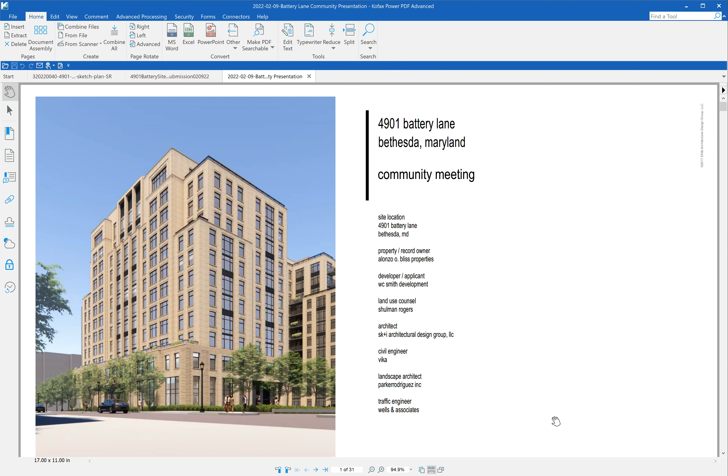So let me get right into it. I'm going to start sharing my screen. Hopefully this will work. Okay, can everyone see my screen? Yep, okay, great.

Most of you are familiar since you live on this site - it's colored in red here, located right on the north edge of Bethesda next to NIH in the Battery Lane district, which is outlined in red. There are two concentric circles on this plan showing it's about half a mile in each direction to the Bethesda metro station, and to the north to the medical center station on NIH.

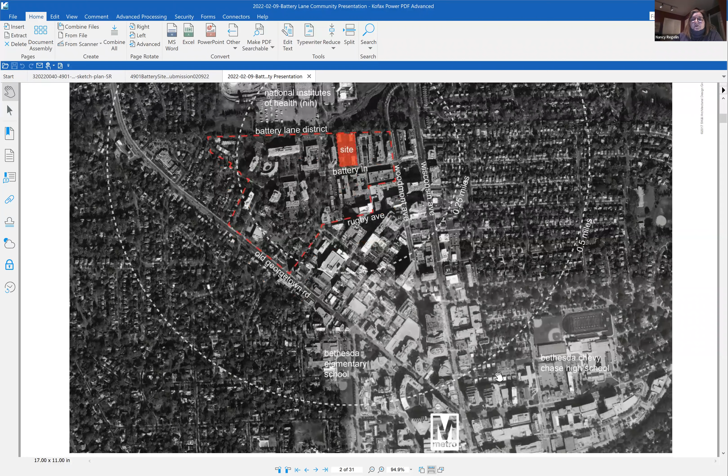This gives you a closer, simplified view to show some of the key highlights in the Battery Lane district neighborhood. The property is outlined in red, the building is shown in yellow, and the green dotted lines are the trail system.

You see the Bethesda Trolley Trail across the top, which goes through NIH all the way north to the Pike Corridor District and other trails further north. It also comes south about one property west of this site, down through Battery Lane Park and into the Woodmont Triangle and the rest of Bethesda.

The Bethesda downtown sector plan looked at Battery Lane and recommended connectors in the neighborhood that would get you from the Bethesda Trolley Trail over to Woodmont Avenue. At the top of our property at 4901 Battery Lane, outlined in red, there's a green dotted line that goes from the Trolley Trail to Woodmont Avenue - that's the east-west connector. The segment next to Woodmont Avenue already has an easement granted.

The next segment is one of the buildings in the Aldon Development Project approved in 2019 - they're planning to do a segment, and this project is planning to do a segment. So eventually there will be a continuous segment between Woodmont Avenue and the Trolley Trail.

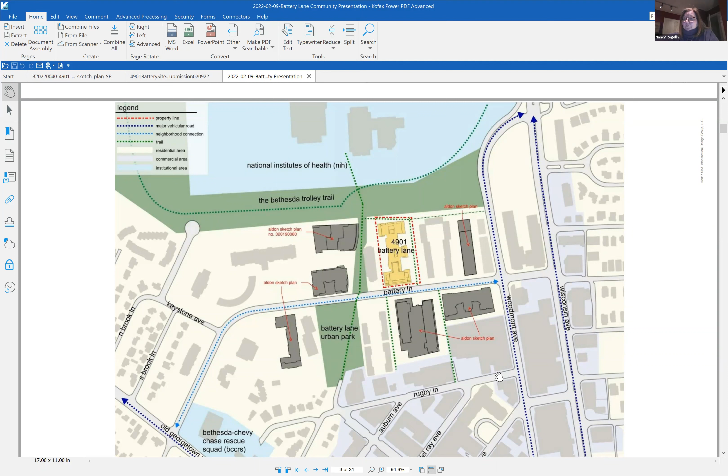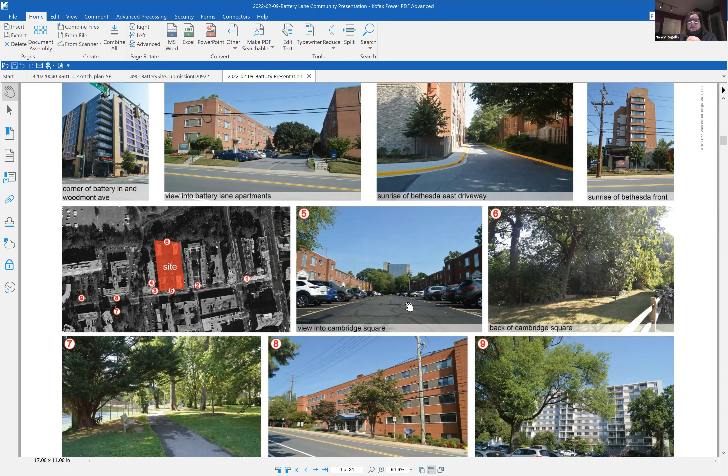So let's move on - you're familiar with this neighborhood, but this site is located about one property north and east of the Battery Lane Urban Park. It's next to Sunrise Senior Living Facility, and about 415 feet west of Woodmont Avenue.

As we came out of the sketch plan, approved in January by the Park and Planning Commission, the Planning Board, certain design goals were established - to design this project for placemaking, compatibility, connectivity, building placement, street activation, and a lot of the goals of the sector plan.

In addition, this project has the goal of creating a signature residential tower that connects with the pedestrian experience - which we're going to talk about - Battery Lane, the trail that goes north-south, and the trail across the rear, which is east-west. This connects to all the activity and connectivity within the neighborhood so it relates and is comfortable for everyone.

When we went through sketch plan, that very first step with a conceptual massing of this building, it went through a design advisory panel, which is Park and Planning's architectural review. That DAP panel recommended a couple of things, including that when we went to site plan, we strengthen the relationship of the rear yard and the activities in the rear yard to that trail across the NIH boundary.

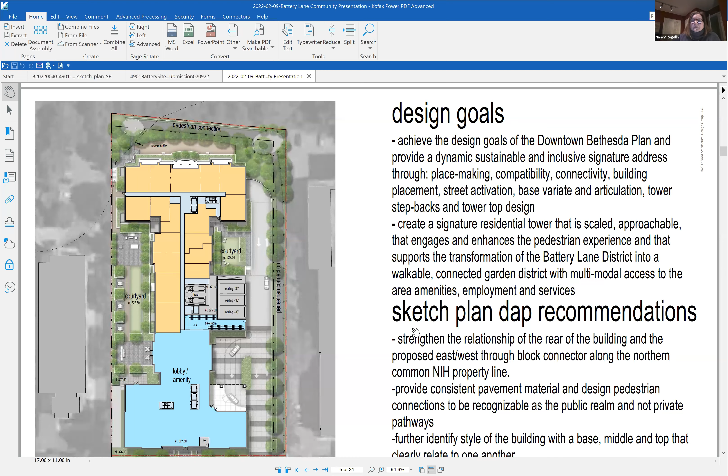It should provide consistent pavement materials and other identifiers so people would understand that this is a public trail, and that they would feel comfortable entering the site and moving through this connector. Then, because the concept plan was only conceptual, we needed to move into site plan and further identify the style of the building with a base, middle, and a top.

So let's show you what the building looks like for site plan. This is the frontage of the building along Battery Lane. The project is 372 dwelling units.

At sketch plan, we got approved for up to 399. The project is now proposed at 372 dwelling units. It's 12 stories, 120 feet, with a rooftop pool, amenity space, and deck.

It has 305 underground parking spaces, and it has 2 through-block connections on an internal driveway so that all drop-offs, all loading, and all traffic to the parking are handled on site and not on Battery Lane.

From Battery Lane, the driveway, which is currently in the middle of this site as it exists today, was moved to the east side. The sidewalk along Battery Lane, currently only 4 feet wide, has been moved away from the curb. There are street trees, a widened 7-foot sidewalk, and a second row of trees along the building face.

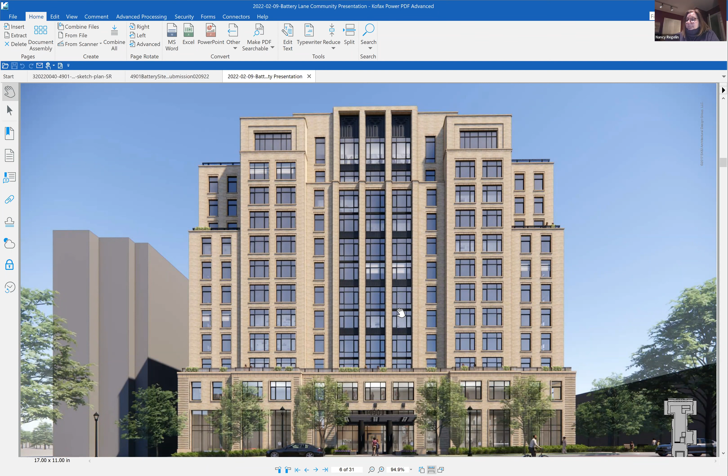So let's run around the building and give you an idea of what it looks like. This is the side of the building as you're coming down from Woodmont. You can see that the sides of the buildings are as articulated and complex of a design as the facade.

There's no backside to this building on any facade. This is the east facade along the internal driveway. On the left-hand wing you can see a covered porte-cochere, which is a circular drop-off and pickup point for the building. On the central wing there's a loading dock with bays for move-in loading, for services, and for trash. And on the far right, the driveway proceeds to the final wing where there's an underground parking garage entrance.

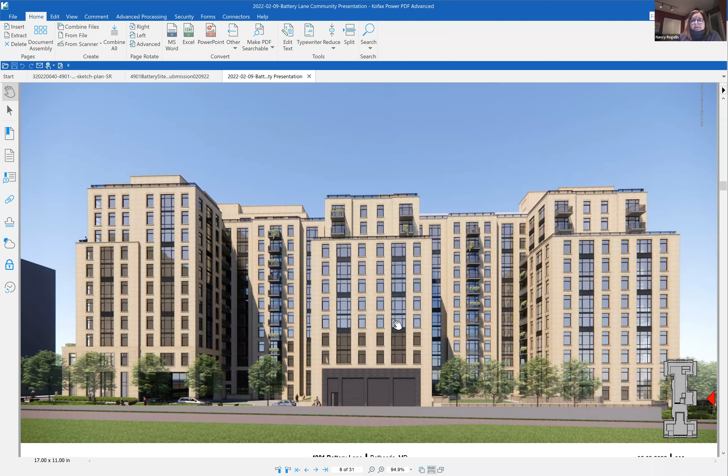Now the rear view of this property - I'll tell you, all the trees on NIH and all the trees on Sunrise have been removed from this view just so you can see the back of this building. But in fact there are quite a few trees on NIH and quite a few trees at the back of Sunrise. Along the back of this building it's fully articulated with balconies, rooftop terraces, and rooftop amenity space looking out over NIH.

You can see that east-west public connector with people moving back and forth along it. And you can see that there will be entrances for residents from that rear connector into the building.

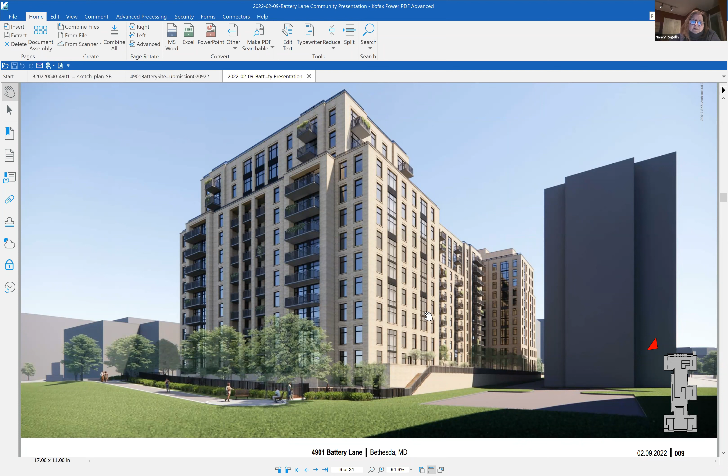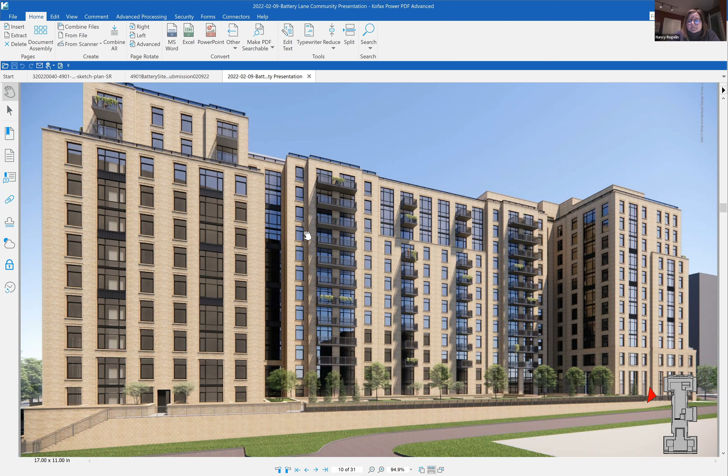Now we move to the west side, tucked along the Sunrise building. Their driveway is in the foreground here. Tucked into this building is a very large at-grade courtyard, and there are two wings of the building on this side that cuddle this courtyard and basically prevent the noise from the street and the traffic to the north, to provide a great courtyard experience.

Sunrise is here, grayed out on the left, so you can see what this building looks like if you're at Battery Lane Urban Park looking north, east on Battery Lane.

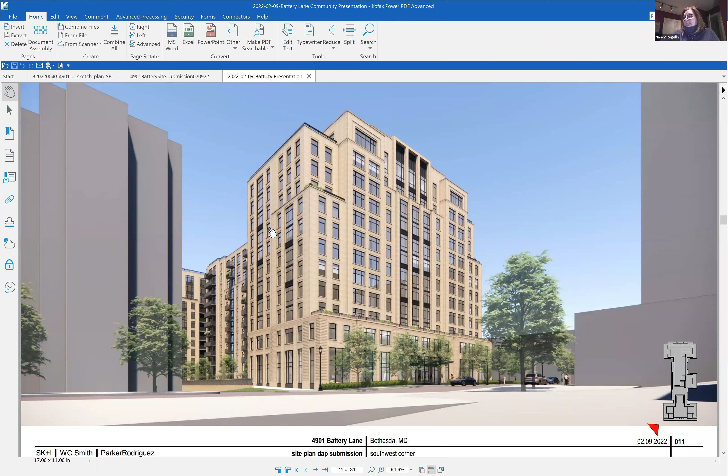So this is a bird's eye view to give you a better understanding of the driveway side. Here you can see the porte-cochere with the circular drop-off, the loading dock, and it heading down to the parking garage.

If you look at the far right of this property, you can see the pedestrian connector, the north-south connector to the rear. It's got trees along it, is separated from the driveway, but has full visibility to the driveway to give you all that activity and light, making you feel very comfortable on the pedestrian connection.

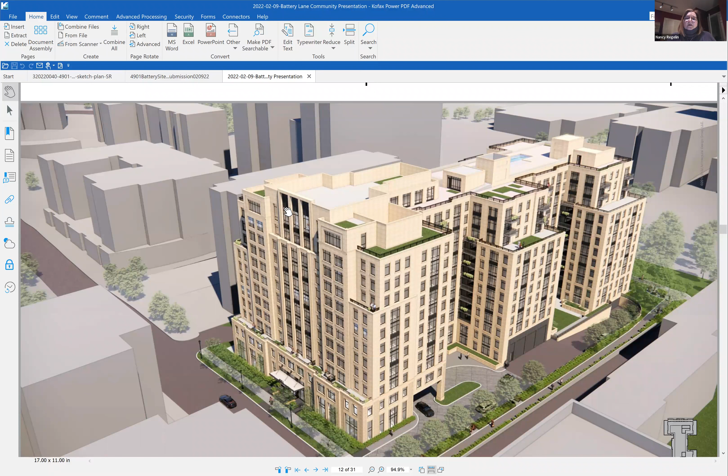You can see that there are numerous step backs of the building at multiple heights to reduce the perception of the scale of this building, but also to create a lot of great outdoor spaces for the residents.

This is a close-up view of the front entrance, which is at the center of the building on Battery Lane.

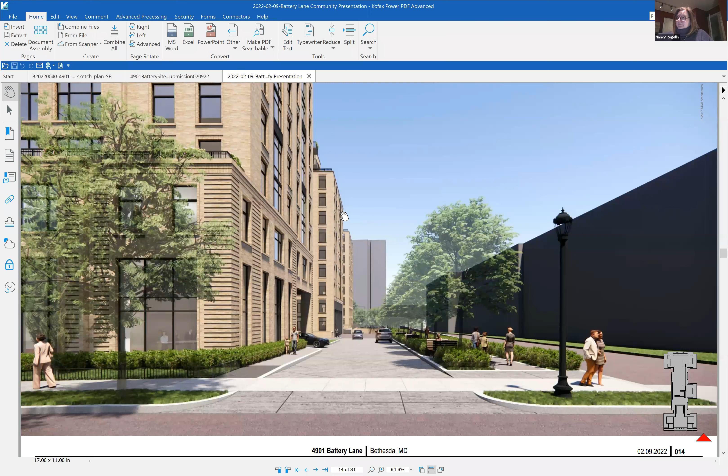This is standing in Battery Lane, looking down the driveway. You can see a grayed out building in the far view - that's NIH. And to the right, that's the Battery Lane apartments next door. You can see clearly how that pedestrian connection running north-south from Battery Lane connects to the Battery Lane sidewalk and moves through the site to the rear. And you can see how the driveway is designed to pull all of the activity away from Battery Lane so that all movements for this particular building are on site and not affecting Battery Lane.

Let's look at the trail a little bit more closely. We're now in the rear right-hand corner of the building, the northeast corner. To the left, the woman in green is walking towards Battery Lane along that trail. You can see there's a nice, beautiful node at the crossroads to give a moment of respite and seating for people walking on the trail.

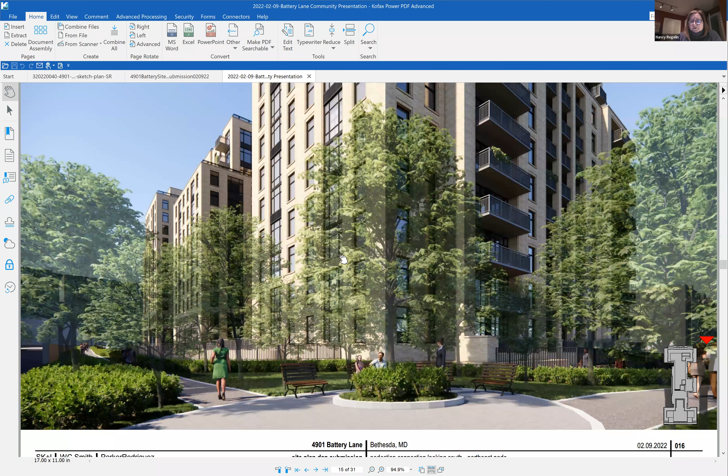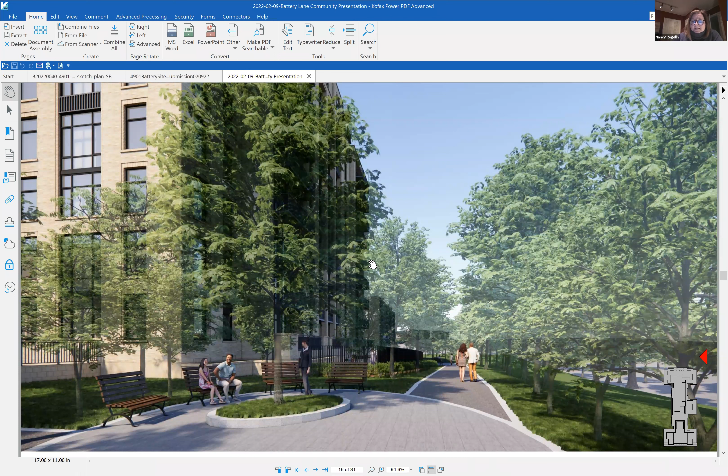As you proceed to the right, along the rear property line, you can see people walking down there, and the trail is open to NIH with all of its trees. There's a dog run fenced in on the left-hand side, so if you like to watch dogs have antics, you'll be able to use this trail and see the dogs playing in their dog run.

This is a picture of the node on the west side of the building, and you can see how it connects so that residents can enter from the trail into the garage or into the building on the courtyard side. So the trail's been designed to be open and comfortable and to provide another mode of connectivity through the neighborhood.

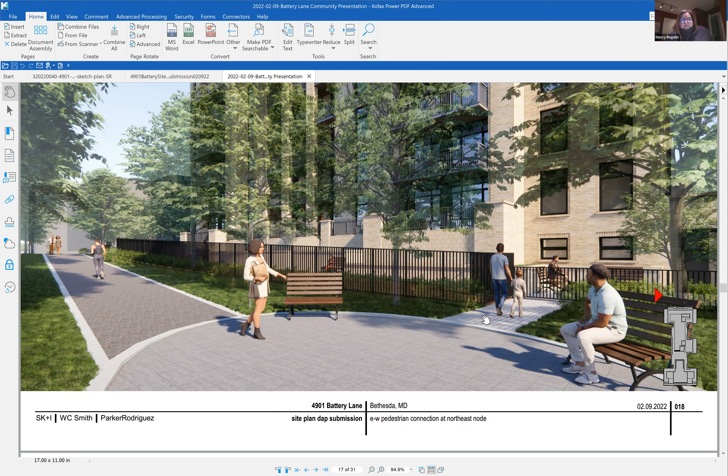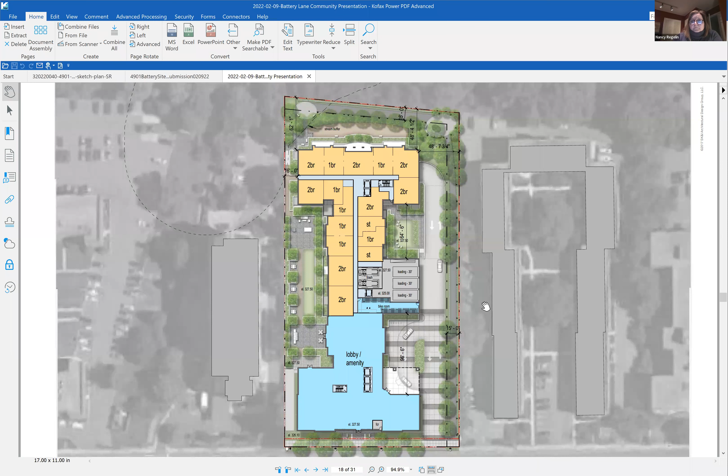And then these are representative floor plans for some of the lower floors, then some of the middle floors. You can see 1 bedroom, 2 bedrooms, and a few studios. And then as you get to the top floors, and on the right is the rooftop deck.

You can see there's a pool on the north side of it. There's some amenity space, lots of outdoor spaces for residents to enjoy. And you'll see a lot of the green color on the roof - those are green roofs to reduce the stormwater runoff from this building.

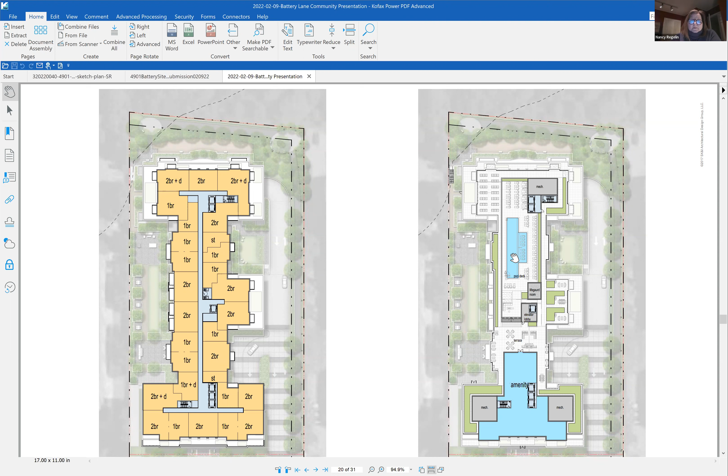So let's talk a little bit about anticipated project timeline. We expect the application to be filed this month. And the design advisory panel - we actually filed today, and we're expecting to be reviewed by that architectural panel on

February 23rd. You can go to Park and Planning's website and watch it live streamed. You can also pick it up afterwards and watch a recording of it. Then we expect that staff and county agency reviews will be between February and June of 2022.

This is a period of time that you can participate by reaching out to staff. This is also the period of time where the staff will review the schools and traffic impacts of the project. A traffic study will be submitted with this application.

I will note that in Bethesda, you don't submit a traffic study for vehicular traffic. Instead, the traffic study focuses on pedestrian, bicycle, and transit use in the area of the project.